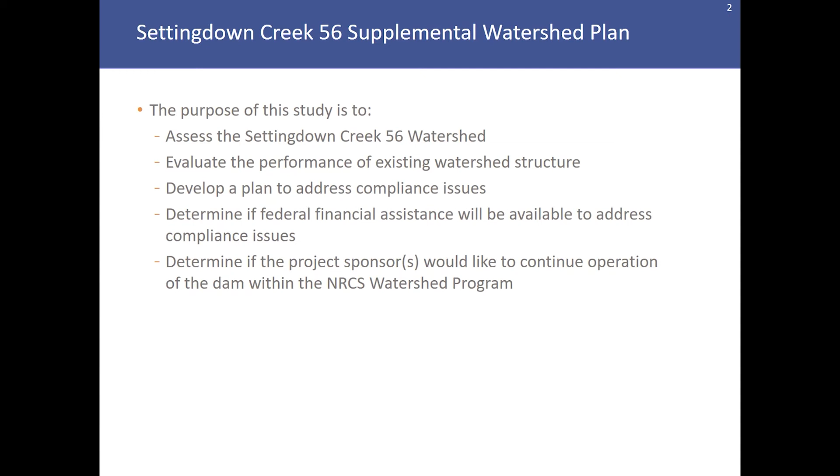This is the second public meeting in the development of the Supplemental Watershed Plan environmental assessment for this dam. The purpose of this planning study is to assess the Settingdown Creek Dam No. 56 watershed, to evaluate the performance of the existing watershed structure, to develop a plan to address compliance issues, to determine if federal financial assistance will be available to address compliance issues, and to determine if the project sponsors would like to continue operation of the dam within the NRCS watershed program.

As part of the planning study, there is a public participation plan. The objective is to inform the public and watershed stakeholders of the planning effort. The planning study requires a series of public meetings.

The initial public meeting was provided in August of 2020 and included a brief history of the NRCS watershed program, a brief history of dam safety, considerations for dam design, operation, and maintenance, an overview of the Settingdown Creek watershed and specific dams included in the planning study, and a solicitation of questions and comments for the scoping topics and opportunities and concerns associated with this planning effort.

We would like to note that if you were unable to view the initial public meeting presentation, it has been reposted to Schnabel's YouTube channel for anyone interested in viewing the presentation and the content described above. This presentation, along with the initial public meeting presentation, will be available until early January 2021 for review and comment.

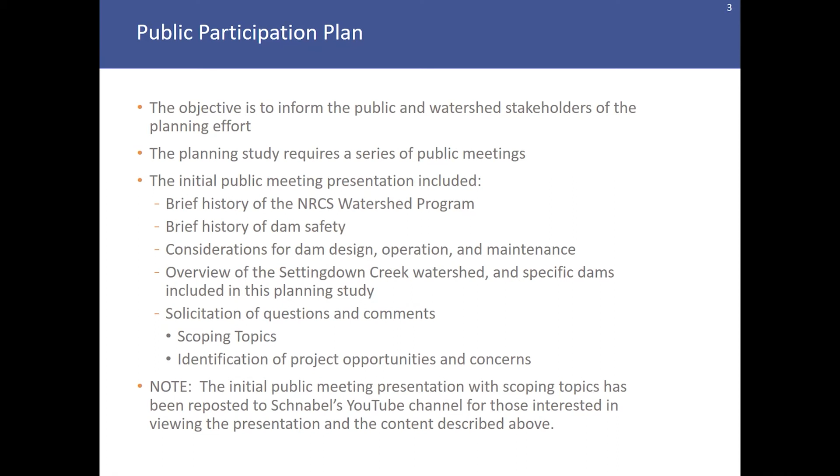During the second public meeting presentation, an overview of the Settingdown Creek watershed and specific dams included in the planning study will be reiterated. Additionally, existing conditions associated with the Settingdown Creek Dam No. 56 will be discussed. A discussion of rehabilitation alternatives under consideration for the dam and an opportunity to solicit questions and comments will also be available at the end of the presentation.

The Settingdown Creek watershed is located in northern Forsyth County, Georgia. Settingdown Creek is a tributary of the Etowah River, which flows into the Coosa River near Rome, Georgia. The watershed contains over 34,000 acres of drainage area.

The original watershed work plan, prepared in April 1954, provided for the construction of 15 floodwater retarding structures or dams within the Settingdown Creek watershed.

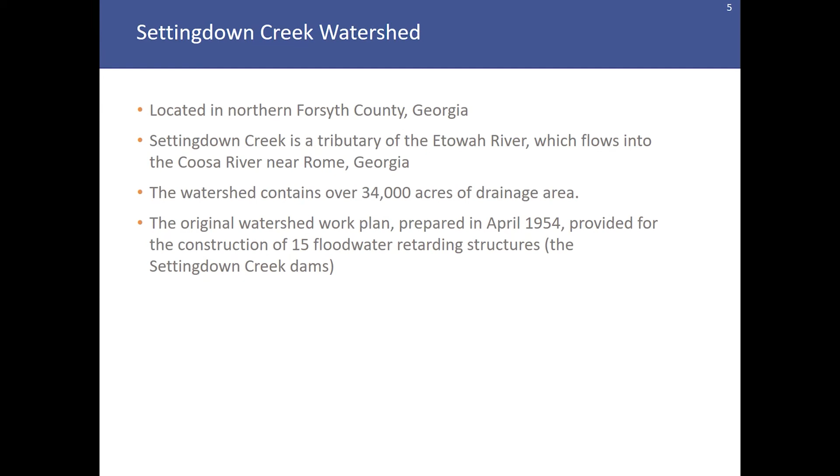This slide indicates the location of the Settingdown Creek watershed overlaid on 1963 aerial photography. This aerial photography shows what the land uses were during or right after the construction of several of the Settingdown Creek watershed dams. As you can see, a significant amount of commercial and residential development has occurred within the watershed over the past 60 years, which will impact the performance of the dams.

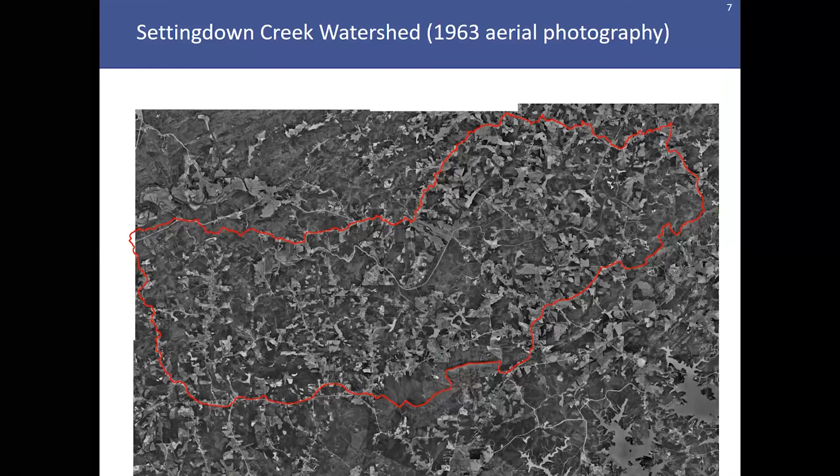Focal points of the analysis and study for the Settingdown Creek Supplemental Watershed Plan include upstream areas. We are concerned with identifying upstream flooding limits as well as the need for additional storage capacity. Also in the study are downstream areas, which could be impacted by flooding or the breach of the dam were it to fail in a catastrophic manner.

We've also taken a look at the existing hydraulic capacity of the spillway outlet works, and we've performed several different storm scenarios to evaluate the performance of the dam during those storm events.

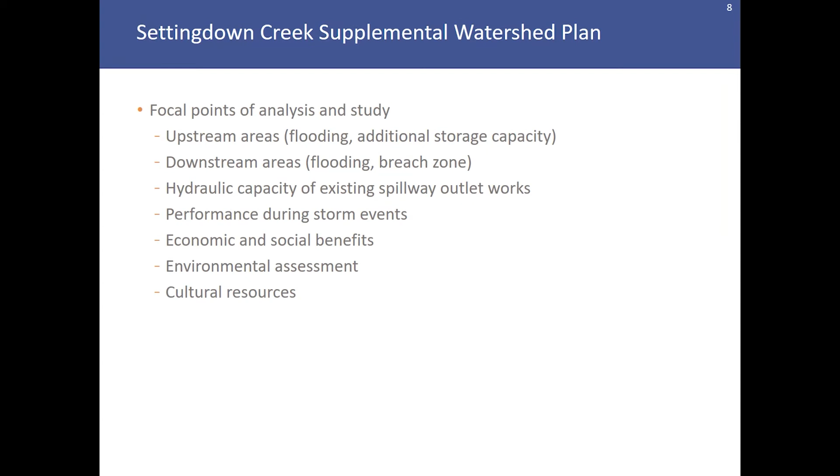In addition to the engineering analysis that has been performed and is being performed, an economic and social benefits evaluation is also underway. Finally, the environmental assessment portion of the study includes an assessment of streams and wetlands, as well as any threatened, endangered, or protected species in the vicinity of the dams, as well as a cultural resources survey to determine if there are any structures or items of historic significance that would be impacted by a rehabilitation of the dams.

Once again, here's a map of the Settingdown Creek watershed. The 6 dams that are currently being studied are highlighted in various colors. The majority of the dams in this study, 5 to be exact, are located at the very upstream end of the Settingdown Creek watershed.

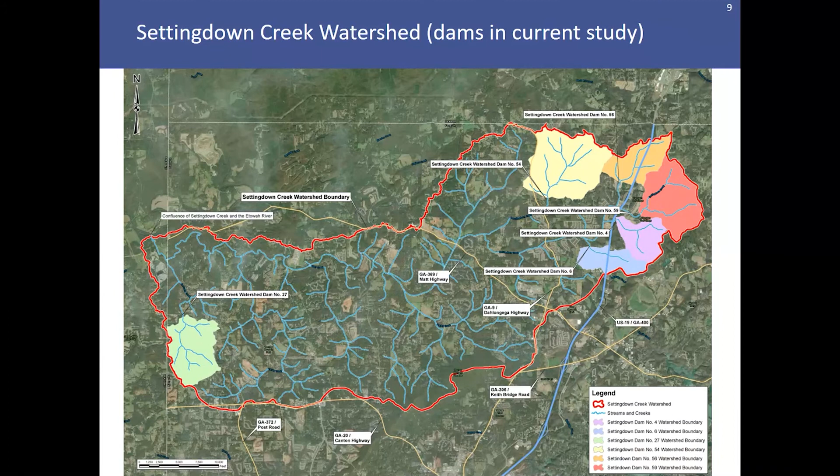Settingdown Creek Dam No. 56 meets Georgia Safe Dams Program criteria to be considered a Category 1 or high hazard dam. This means that failure or improper operation of the dam would likely result in the loss of human life. The dam needs an operating permit from the Safe Dams Program. Previous assessments indicate that it does not comply with current SDP rules and requirements.

The dam is not exempt from these rules and requirements. One purpose of the Supplemental Watershed Planning Study is to determine if federal assistance will be available to bring the dam into compliance with current dam safety requirements. The Georgia Safe Dams Program is fully aware of this dam, its classification or pending classification as a high hazard dam, and that the dam is being studied by the planning team.

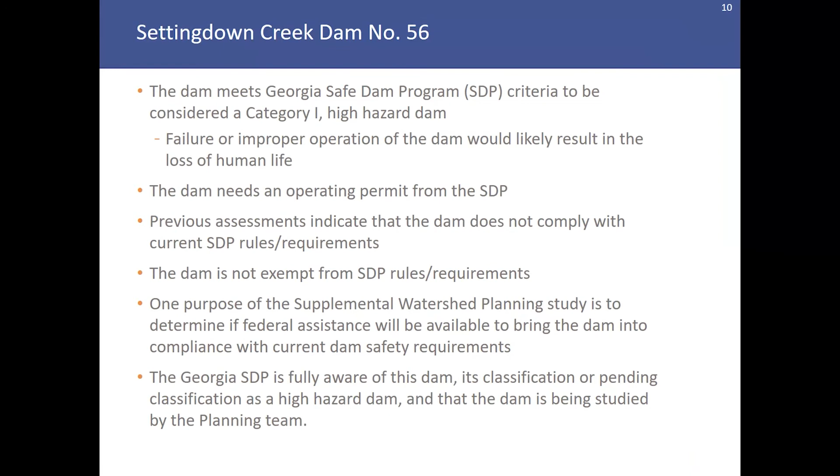Some of the original design features of the dam include that it was not originally designed as a high hazard dam. Its original purpose and primary purpose is flood mitigation. An anticipated secondary purpose of the dam is sediment accumulation and storage.

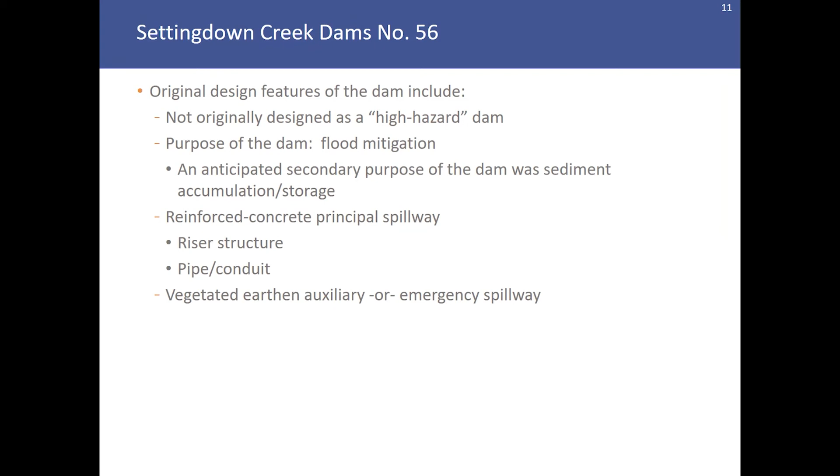The dam includes a reinforced concrete principal spillway, pipe, and riser system. The riser is located in the lake and conveys flows into a pipe or conduit from the lake through the embankment to the outlet channel downstream of the dam. Additionally, a vegetated earthen auxiliary or emergency spillway is located below the crest of the dam elevation in the event that high flows are encountered, so that flows can pass around the crest of the dam without the dam overtopping.

Dam No. 56 is located west of Georgia 400, north of Hubbard Town Road, and south of Plainsman Circle. The dam was built in 1954 and is approximately 66 years old. The dam is approximately 33 feet tall and has a drainage area of just under 1 square mile. The design total storage capacity of the dam is 283 acre-feet, with considerations for sediment storage, flood control storage, and surcharge.

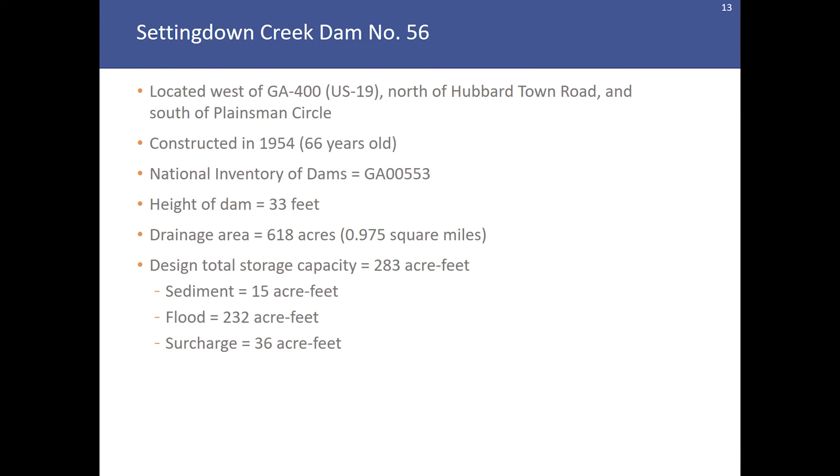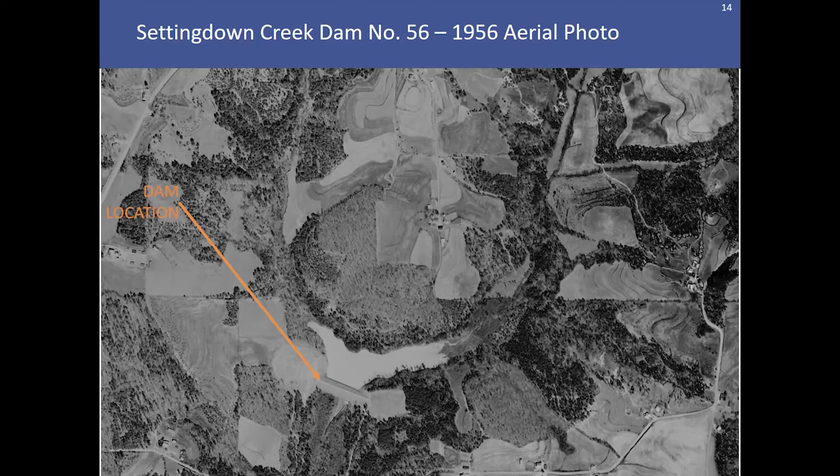Here's an aerial photo from 1956 showing the location of the dam shortly after its construction and impoundment of the lake. Since 1956, a considerable amount of development has occurred upstream and around the dam. Note the location of the residential subdivision adjacent to the lake.

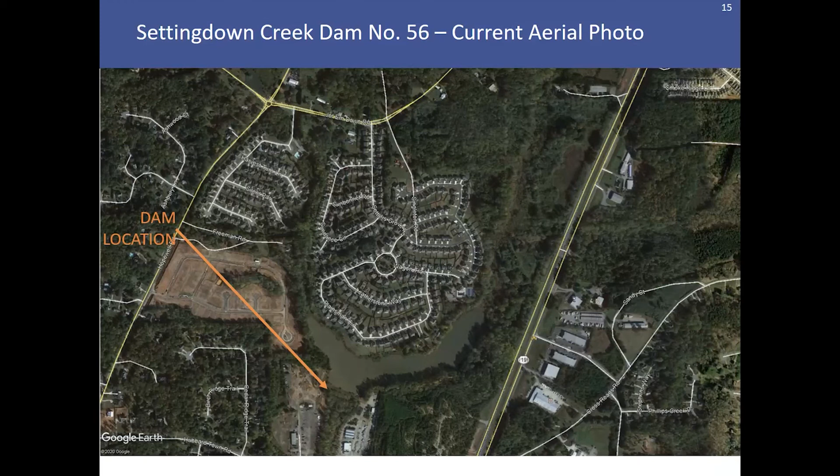As part of the study, a survey was performed this summer of the dam to verify elevations of the dam crest and spillway outlet works. Note that this survey has been oriented with the lake at the bottom of the page and the downstream areas at the top of the page. This is a common practice in dam engineering and allows those with knowledge of dam engineering to orient themselves with regard to a dam.

When you are standing on the crest of the dam with the lake at your back and the downstream areas in front of you, the left and right ends of the dam are referenced in this manner. The aerial photo taken to support this topographic survey was taken after clearing activities were performed this summer of 2020 to remove trees and inappropriate vegetation from the downstream slope of the dam.

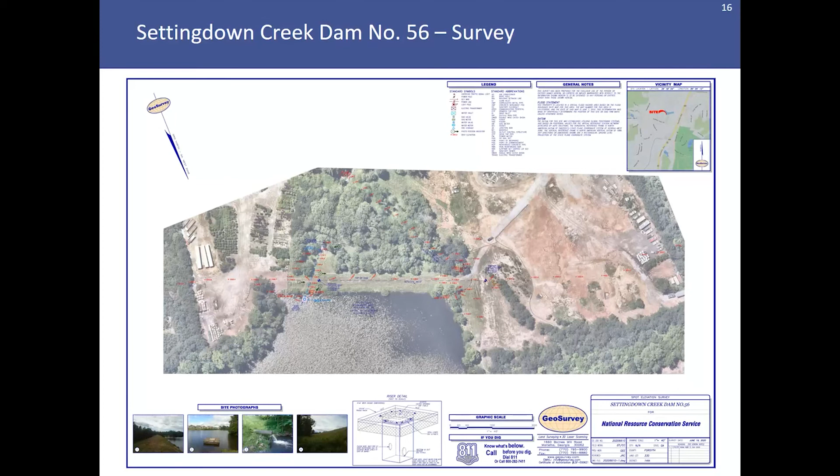This slide shows a site plan of the existing dam and spillways. Note that the existing principal spillway is located near the left end of the dam, and the auxiliary spillway is located near the right end of the dam.

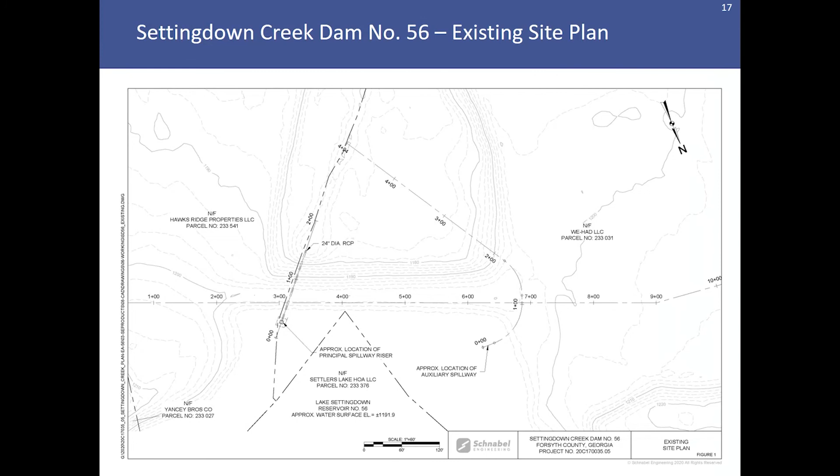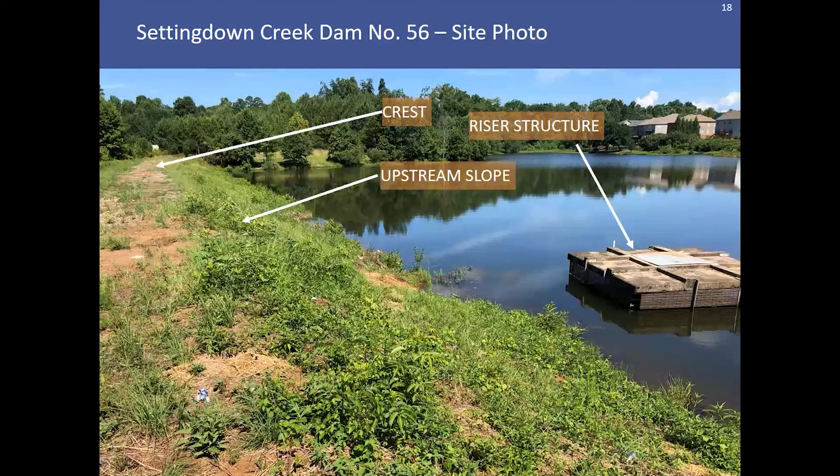We have a couple of photos of the existing Settingdown Creek Dam No. 56. The first photo shows the locations of the concrete riser structure, the upstream slope, and the crest of the dam. At the top right of the photo, you can see some of the homes in the residential subdivision located upstream of the lake.

Part of the planning study includes an environmental assessment of the dam and its adjacent areas. An environmental survey was performed for Dam No. 56. An aquatic resource survey map has been shown on this slide to indicate the locations of streams, wetlands, open water, and the survey area.

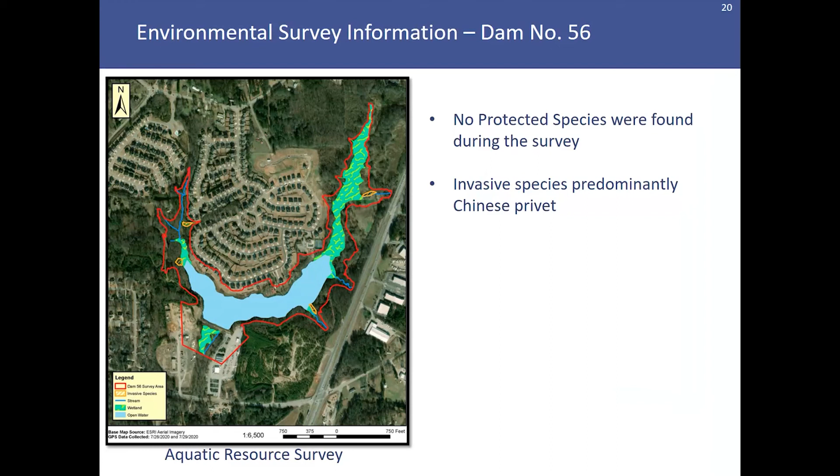The survey team found no protected species during the survey. Some invasive species, predominantly Chinese privet, were identified, and those locations are also indicated on the aquatic resource survey.

Also, as part of the environmental assessment, a Phase 1 cultural resources survey was performed. This survey included literature review and field activities, including shovel tests. The results of the study found that no archaeological resources were recorded. The dam, approximately 66 years old, is the only historic resource, but it is not eligible for the National Register of Historic Places. The Cultural Resources team recommended that no additional work be performed for this dam.

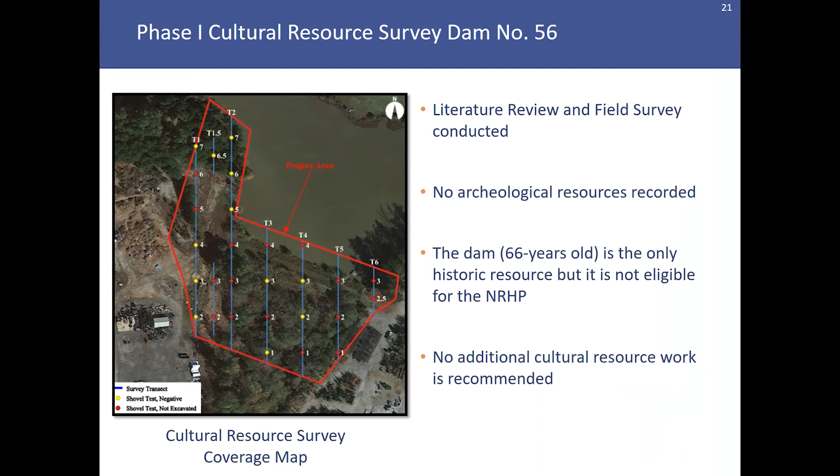This slide shows a dam breach inundation map and the location of downstream hazards that could be impacted in the event of a catastrophic failure of the dam. The dam breach analysis was performed using sunny day parameters with water at the top of the dam. This is a common configuration or analysis method for NRCS flood control dams.

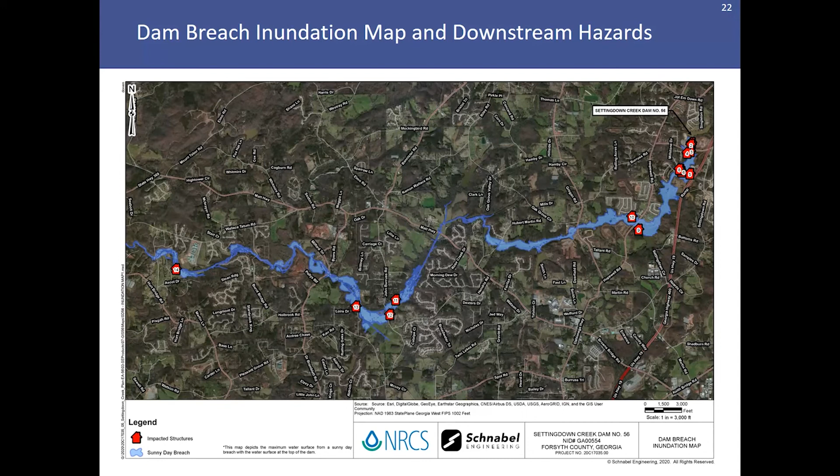This slide has a downstream flood analysis map included. This map includes the upper portions of the Settingdown Creek Watershed located upstream of John Boris Road. Note that not only the 5 dams included in this study are shown on the map, but also a couple of other dams, Settingdown 10 and 21, are also indicated to determine the flood limits during a variety of storm events.

The flood limits for the 100-year and 500-year storm events are indicated on this map. Downstream flood analysis is important as we develop rehabilitation alternatives and scenarios for these dams, because the dams currently provide some level of flood benefits to downstream areas, and their removal or modification could impact the benefits that are currently provided.

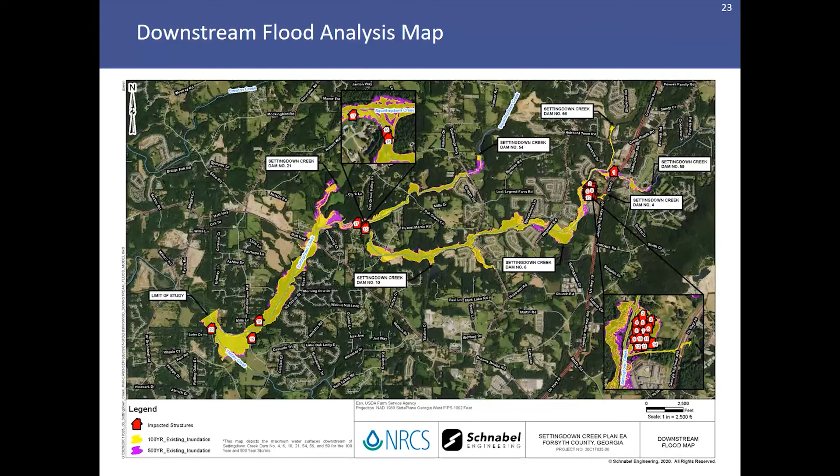This map indicates the upstream flood limits associated with the dam. During the engineering analyses performed for this dam, the spillway, outlet works, and storage were modeled, and several storm events were run through the dam and spillway outlet works.

This map indicates the contour elevations associated with the existing normal pool elevation of the lake, the auxiliary spillway control section, and the dam crest elevation. Additionally, water surface elevation limits associated with the 100-year storm, the 500-year storm, and the Safe Dams Program design storm are shown.

The Safe Dams Program design storm is currently the 1/3 probable maximum precipitation, which is 10 inches of rain in 6 hours, and the freeboard hydrograph, or FBH storm event, is the NRCS design storm event for the dam, which is 100% of the probable maximum precipitation. Note that there are a couple of structures that would be impacted by the design storm events should the watershed experience those events.

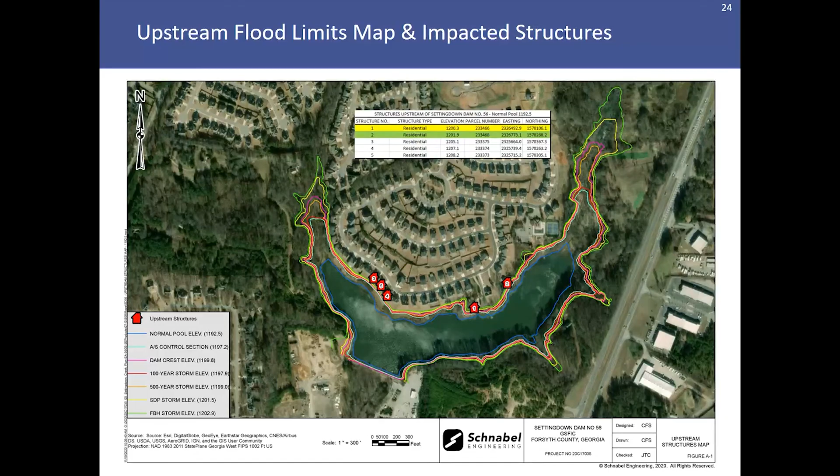During the engineering analysis and archival review for this dam, several existing dam deficiencies were identified. Operations and maintenance issues include that the normal pool elevation of the lake was raised by approximately 11 feet in the 1970s without authorization. This impacts the design flood control benefits intended for the original dam.

In the summer of 2020, the dam was recently cleared of trees and inappropriate vegetation, and an appropriate turf grass was reestablished on the embankment.

An underwater inspection of the riser structure was performed by commercial divers and concluded that portions of the slide gate assembly are worn and/or corroded. Additionally, portions of the riser concrete are cracked and/or spalled.

A CCTV inspection of the principal spillway conduit interior is pending, and upon the results of that inspection, decisions can be made whether or not the pipe is of soundness to continue serving the dam.

Existing hydraulic deficiencies include Safe Dams Program criteria not being met. During the SDP design storm event, which is currently 1/3 of the probable maximum precipitation, or about 10 inches of rain in 6 hours, the dam overtops by 1 foot and the auxiliary spillway breaches.

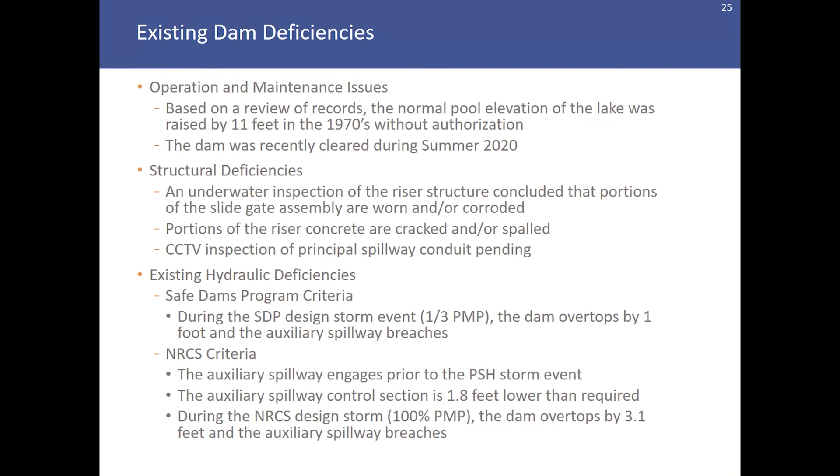The planning team is considering several rehabilitation alternatives based on NRCS planning procedures. The first alternative is the future without project or no action alternative. This assumes that no federally financed rehabilitation alternative will be available, so rehabilitation funding for this alternative would come from state or local sources.

This alternative would utilize the criteria developed by the Georgia Safe Dams Program for a high hazard dam rather than NRCS criteria. Another alternative being considered is decommissioning the dam. This involves the removal of a portion or entirety of the existing earthen embankment, stabilization of the excavated channel and resulting lake bed, and it may also require floodproofing and/or relocation of downstream hazards.

Structural rehabilitation alternatives would meet NRCS criteria. They would include embankment improvements, the construction of a new principal spillway, and the construction or modification of the existing auxiliary spillway. Auxiliary spillways could be earth cut, labyrinth crested concrete spillways, or RCC step spillways with either a broad or ogee crest. The development of NRCS rehabilitation alternatives includes consideration of upstream non-flood control ponds.

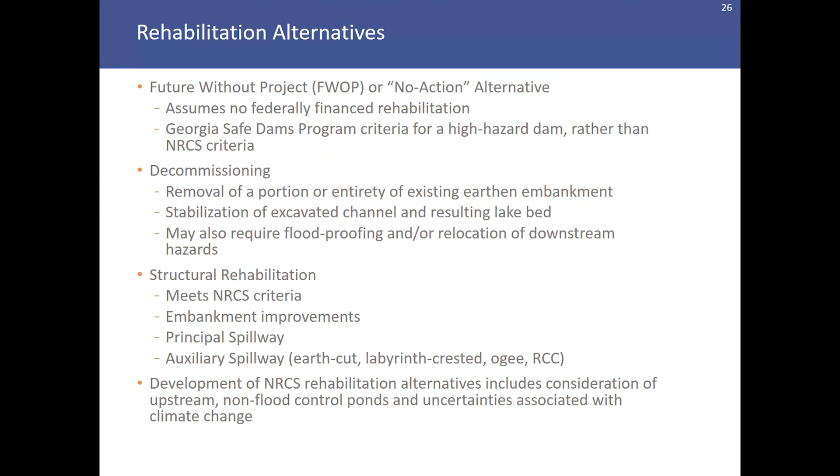The first alternative we will review is the no action alternative, which would meet Safe Dams program criteria for a high hazard dam. The dam would have to be raised to provide adequate freeboard, resulting in the design storm increasing from 1/3 of the PMP to 1/2 of the PMP, based on height requirements established by the Georgia Safe Dams program. The upstream and downstream slopes would be regraded to 3:1, and a riprap lined wave berm would be constructed along the upstream shoreline of the dam.

The existing vegetated spillway would be decommissioned by placing fill up to the crest of the dam elevation. The principal spillway would be rehabilitated by decommissioning the existing spillway and constructing a new spillway riser structure that would return the normal pool elevation to its originally designed level, approximately 11 feet lower than it currently is today.

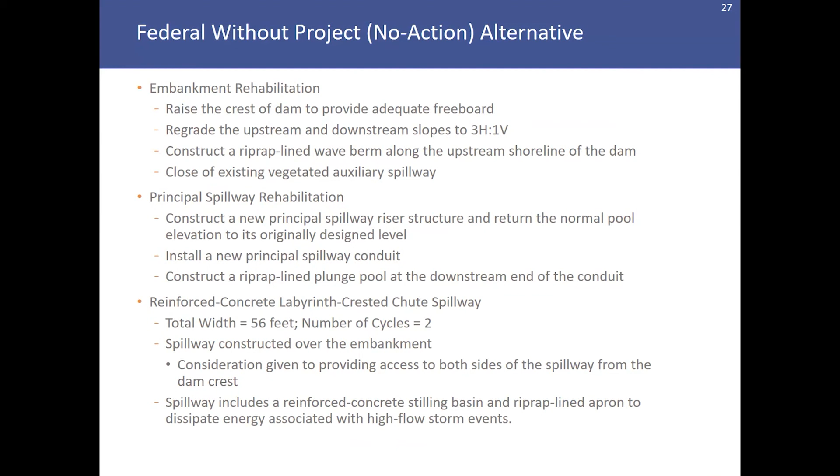A new principal spillway conduit would be installed, and a riprap lined plunge pool would be constructed at the downstream end of the conduit. The auxiliary spillway to service the Safe Dams program storm event would need to be 56 feet wide, consisting of 2 Labyrinth cycles of equal width. The spillway would be constructed over the embankment with consideration to access both sides of the spillway from the dam crest. Finally, the concrete spillway would include a stilling basin and riprap lined apron to dissipate energy associated with high flow storm events.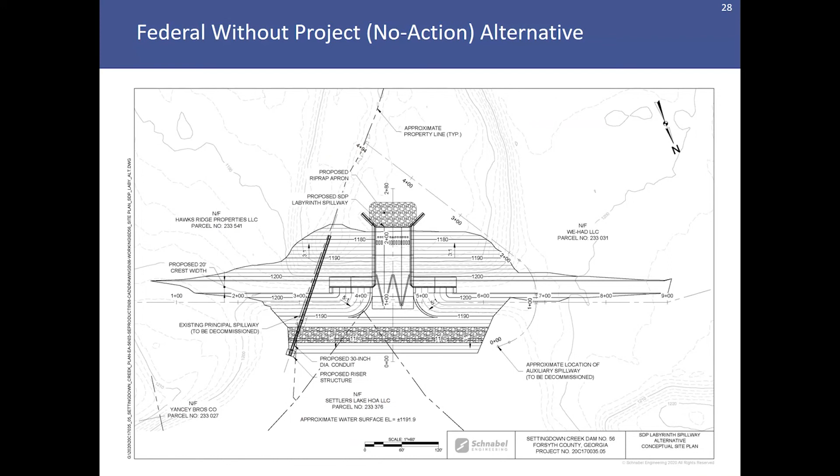This slide shows a conceptual layout of the Labyrinth spillway necessary to meet SDP criteria. Note that the principal spillway would be reconstructed or replaced, and a new Labyrinth crested spillway would be constructed over the embankment.

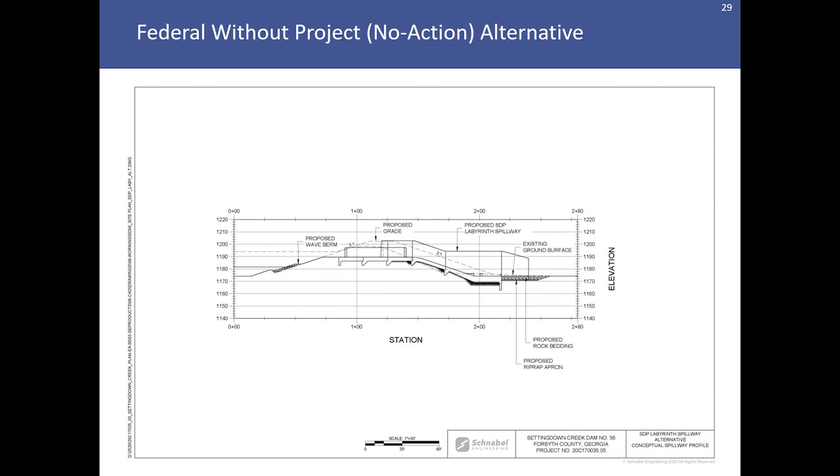The first NRCS structural alternative that was considered involved a vegetated auxiliary spillway alternative. This alternative was considered and determined to be infeasible due to the nature of the modifications necessary to meet NRCS requirements. This means an excessive amount of raising or widening of the auxiliary spillway would be required to meet and pass the NRCS design storm criteria without the dam overtopping or without the auxiliary spillway breaching due to high flows and erodibility.

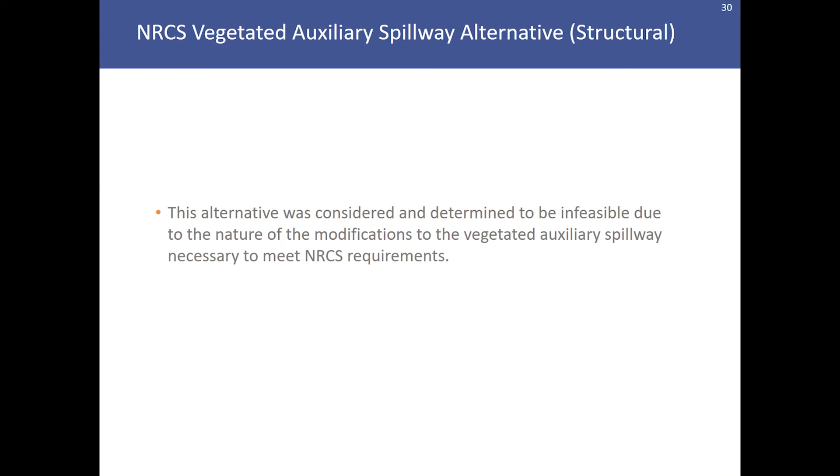A decommissioning alternative is also being considered by the planning team. This alternative would involve reconfiguring the existing structure so that it would no longer be classified as a dam. The process is more involved than simply breaching the dam. Decommissioning would involve removal of most or all of the existing dam, reconnecting the grade of the original floodplain, stabilizing the resulting lake bed with permanent vegetation, and stabilizing the primary channel through the footprint of the old dam with riprap.

While decommissioning the structure would improve flooding upstream of the dam, the downstream flood benefits provided by the dam would be lessened. The planning team is currently evaluating and quantifying the downstream benefits provided by the dam, as well as the loss of those benefits were the dam to be removed.

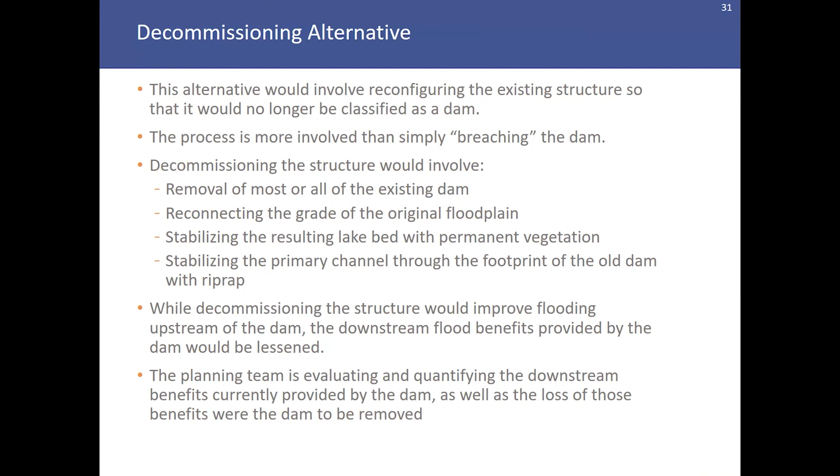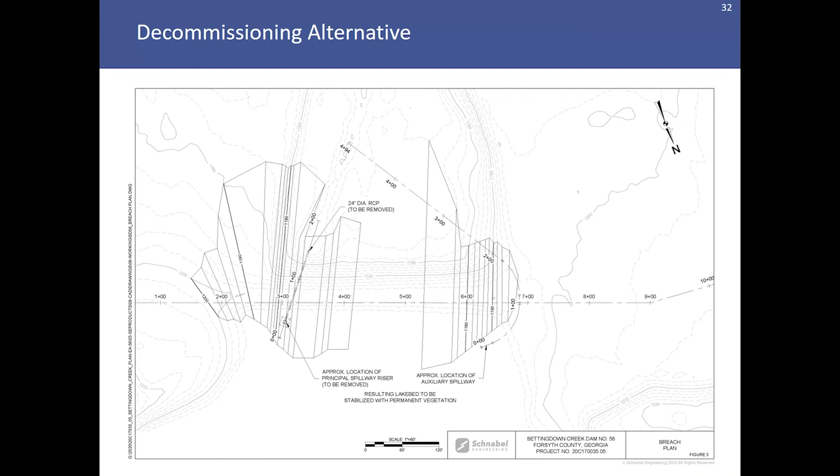This slide provides the conceptual site plan of the removal of the dam and the reconnection of the floodplain downstream of the dam with the lake bed. This alternative would also include stabilization of the lake bed with vegetation and lining of the original stream channel through the footprint of the dam with riprap.

Here are a couple of additional profiles that show what the excavation of the dam and reconnection of the floodplain would entail.

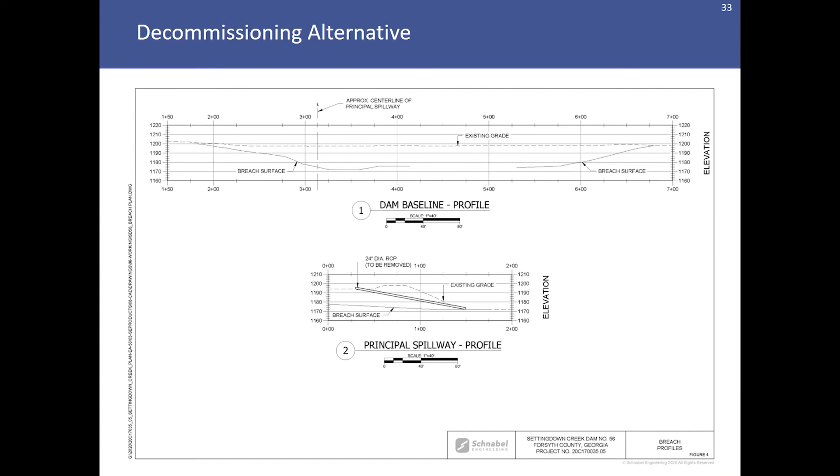Here's an example photograph of a breached dam with a riprap lined stabilization channel running through it.

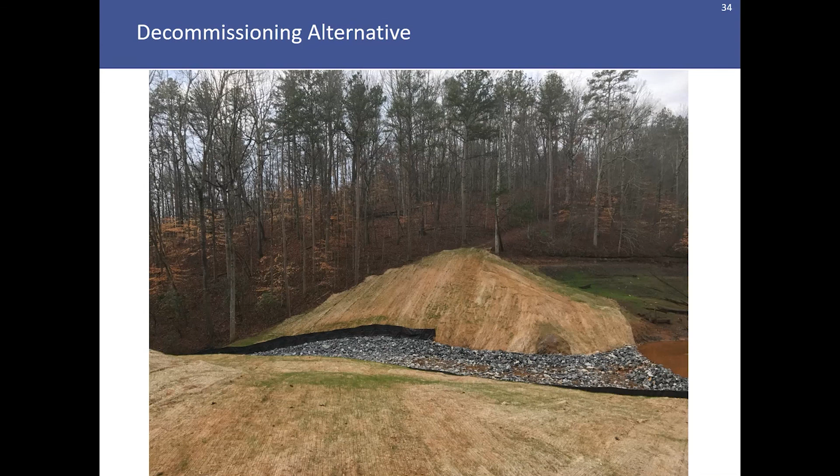Removal of a dam would take away the flood benefits provided by that dam, and any rain that accumulates in the watershed and reaches the dam area would likely flow out at a 1-to-1 ratio. Whatever flows in would also flow out without any storage or attenuation.

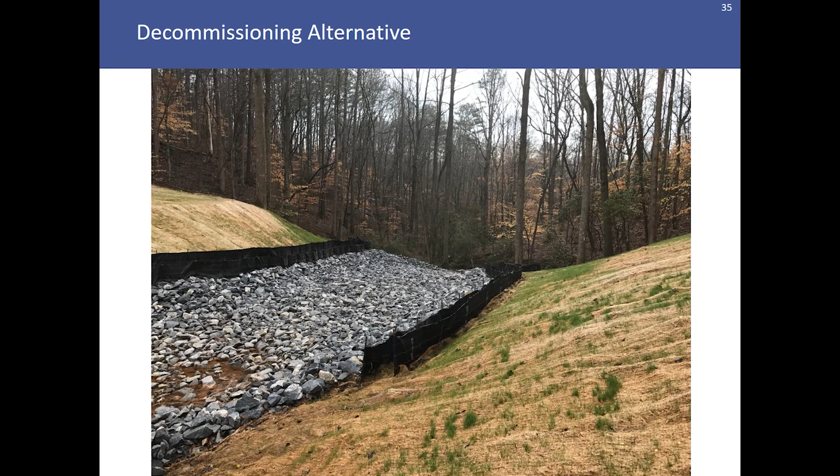The first NRCS structural alternative we will discuss is the Labyrinth Spillway Alternative. Similar to the Safe Dams Program alternative, the embankment would need to be rehabilitated by raising the crest of the dam to the current maximum water surface elevation associated with the design storm, which is 100% of the PMP. The upstream and downstream slopes will be flattened or regraded to 3-to-1.

The riprap lined wave berm would be included, and the existing vegetated auxiliary spillway would be decommissioned by closing it off with fill. Additionally, a new principal spillway would be constructed, including a pipe and riser and a riprap lined plunge pool. The existing principal spillway system would be decommissioned or removed.

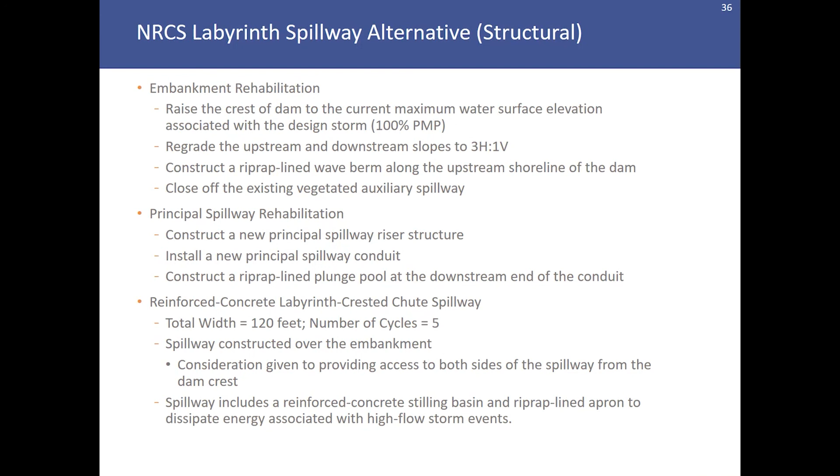The auxiliary spillway in this alternative involves a 120-foot wide labyrinth crested chute spillway. The labyrinth would involve 5 cycles of equal widths, with consideration given to crossing from one side of the embankment to the other from the dam crest. The spillway would also have a stilling basin and a riprap lined apron to dissipate energy associated with high flow storm events.

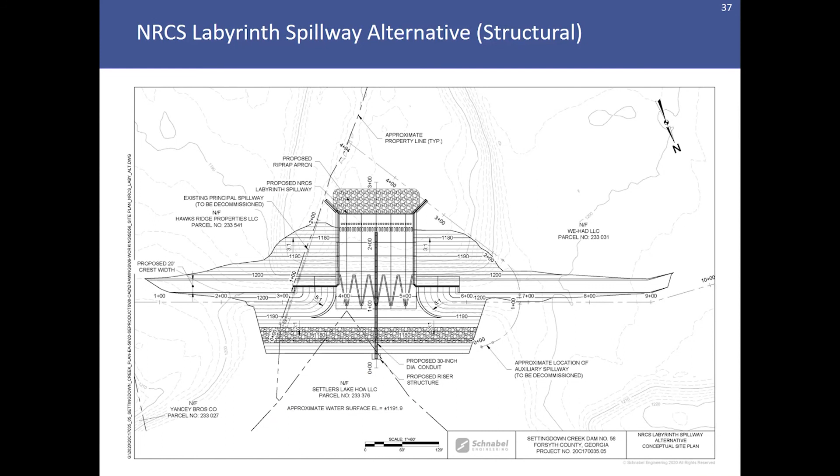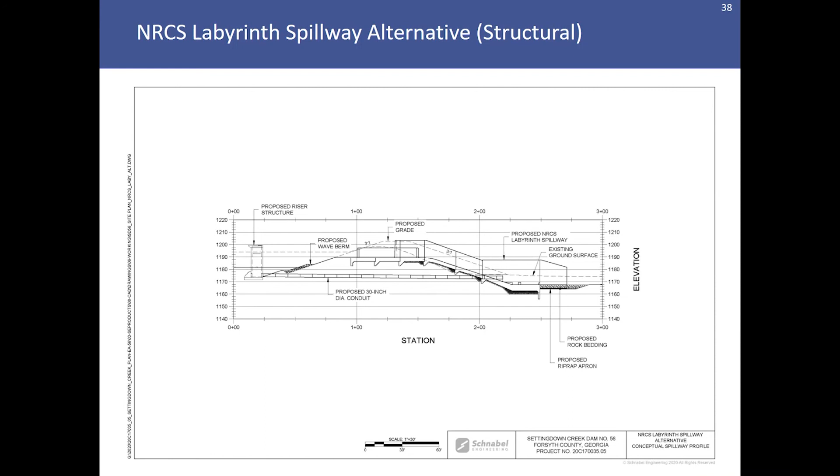This view shows a profile of the Labyrinth spillway. Similar to the Safe Dams Program spillway, water would cascade over the labyrinth walls and down the chute into a stilling basin where the energy would be dissipated, and water flowing through the spillway would be returned to the original stream channel and floodplain.

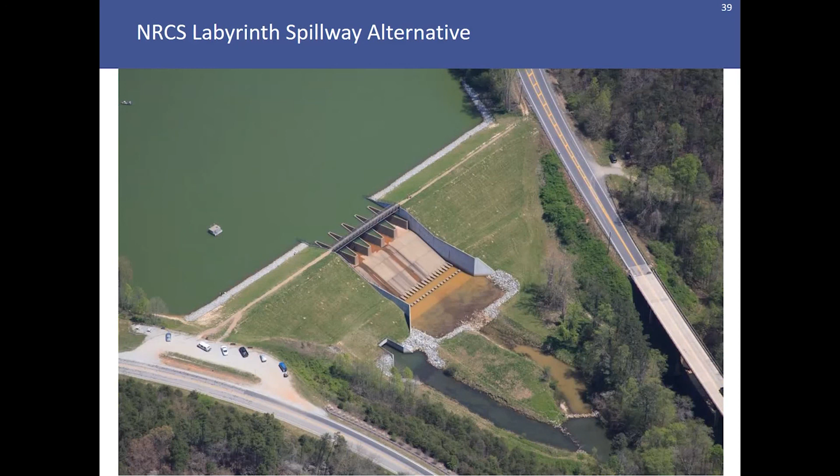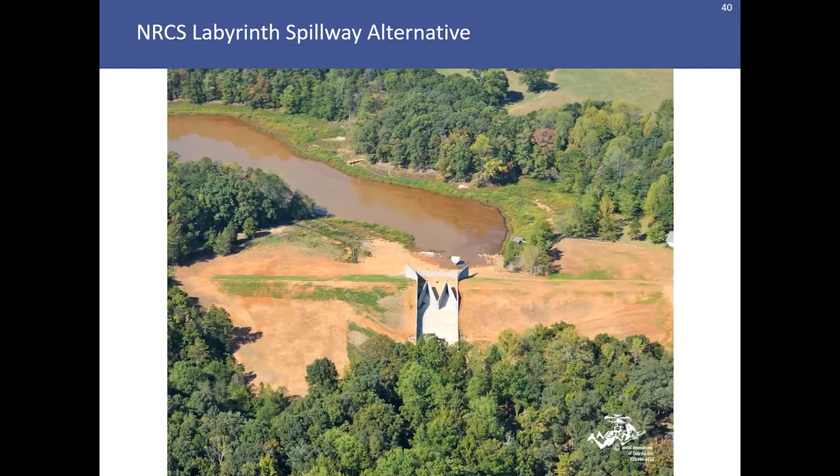Here's one more example photograph of a labyrinth spillway. This spillway was designed to have the principal spillway pipe penetrate the chute so that flows through the principal spillway would discharge into the auxiliary spillway's stilling basin. Consideration for crossing this dam has been provided on the upstream end, and vehicular traffic is available around the upstream side of the dam during periods of no rainfall or normal pool conditions.

The final structural spillway alternative that we'll discuss today that meets NRCS design criteria is an RCC, or roller compacted concrete, spillway. It would involve the same embankment and principal spillway rehabilitation activities as the Labyrinth spillway. The difference would be the auxiliary spillway would be constructed of roller compacted concrete and would be a step spillway with an ogee crest. An ogee spillway is a straight weir that has a rounded top to improve hydraulic performance and flow during high storm events.

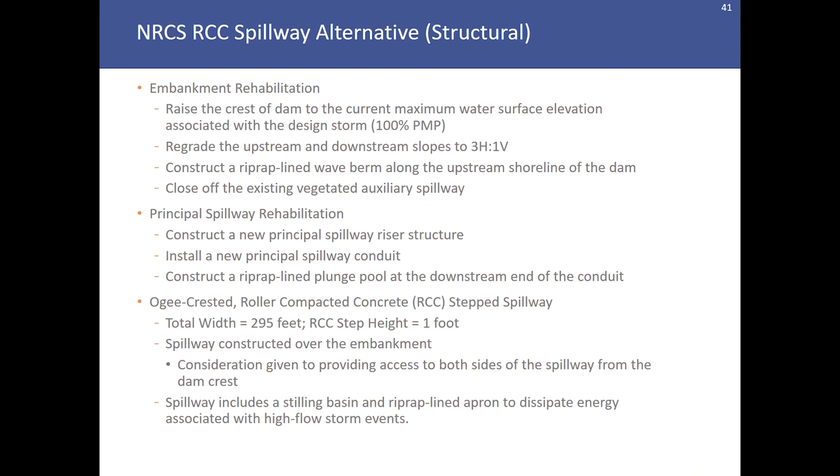The spillway would need to be about 295 feet wide, and RCC steps would be constructed with a 1 foot thickness. As with the other alternatives, consideration has been given to providing access to both sides of the spillway from the dam crest. The spillway would also include a stilling basin and riprap apron at the downstream end.

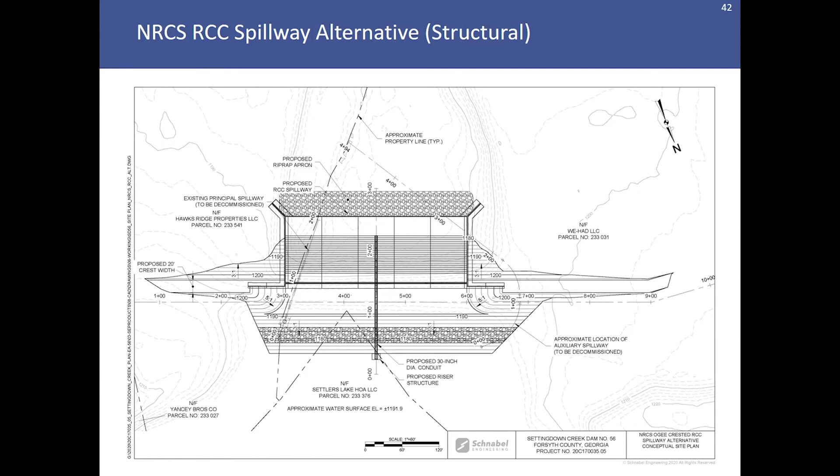Note that the principal spillway in this view has also been shown to penetrate through the step spillway and discharge into the proposed stilling basin.

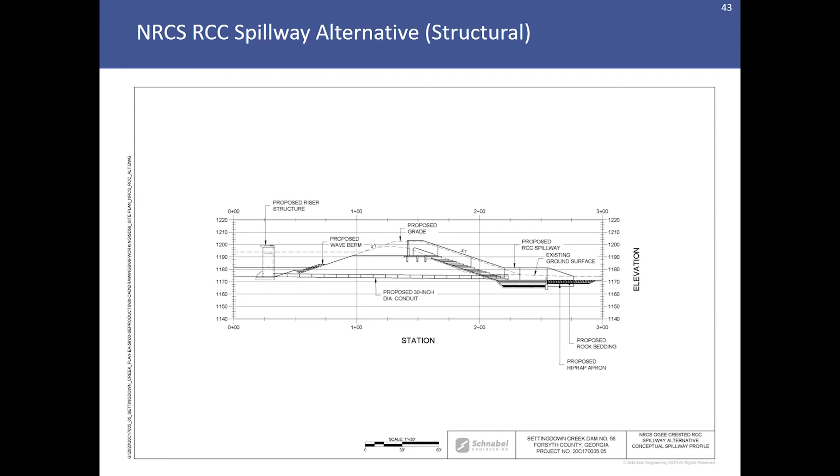Recall that this spillway does not flow all the time, only during very infrequent storm events, such as the 100 or 500-year storm event. So several dam owners with RCC spillways are happy to fill portions of the spillway with topsoil and regrass those areas to improve long-term maintenance and appearance of those spillways.

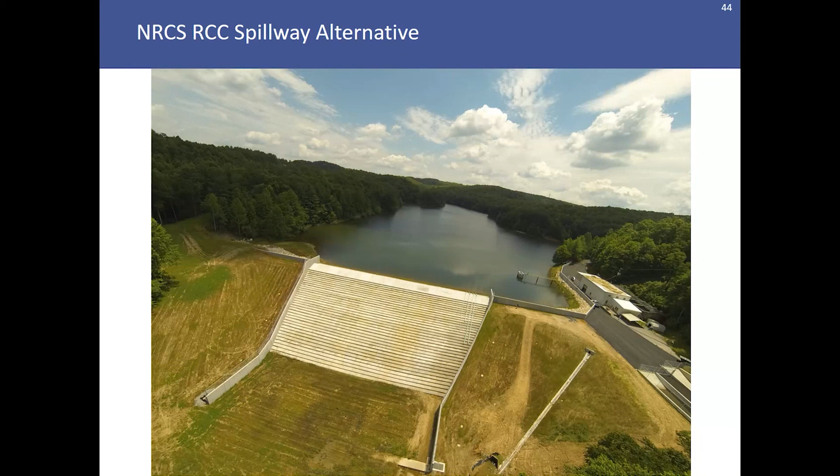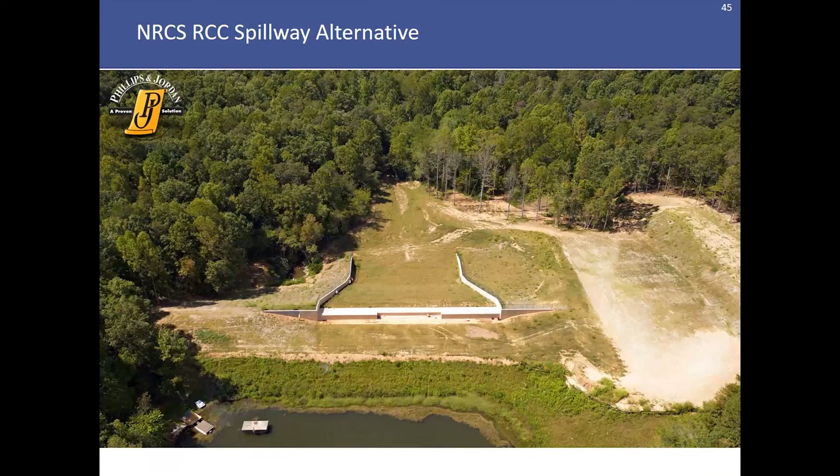This is another example of an RCC spillway. This one has an ogee crest, but as discussed previously, the downstream stilling basin and steps on the step portion of the spillway have been covered with topsoil and grass to improve maintenance and appearance.

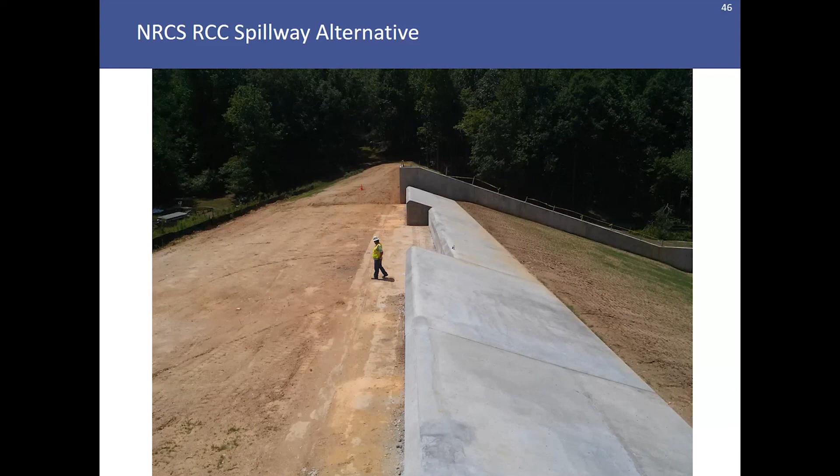The final photo here shows another RCC step spillway that has been covered with topsoil and grass. This principal spillway has been designed to penetrate through the RCC steps and is flowing into the stilling basin downstream of the RCC spillway. This photograph was taken during construction before vegetation had had a chance to establish, but over the period of a few months, this vegetation did establish and is now covering the stepped portion of the spillway.